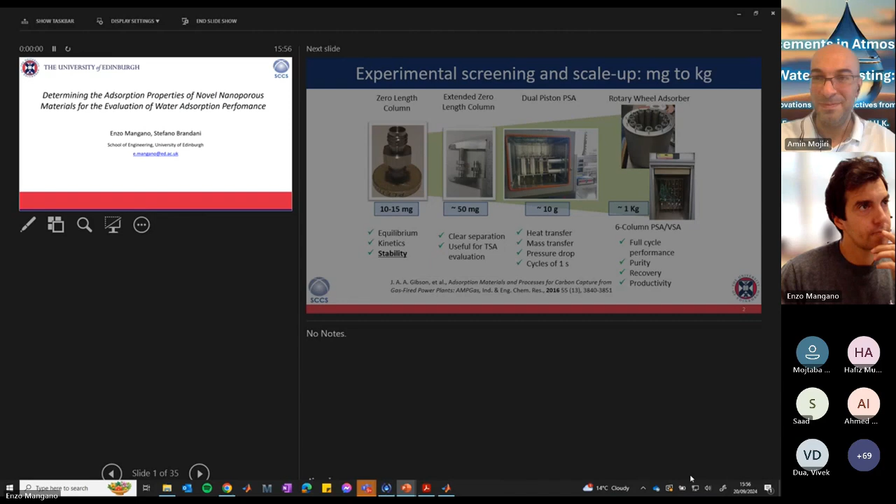Thank you. Can you all see it? Yes, perfect. Perfect. All right, so welcome everyone. Sorry for joining late the meeting. I've been teaching up to half an hour ago, so it's been a little bit complicated.

My presentation is about a technique we use in our lab to measure water adsorption. We are able to measure kinetics and adsorption equilibrium for water vapors. Professor Brandani and myself lead the adsorption group here at the University of Edinburgh.

We have quite a number of techniques, and we cover all the sample masses from a few milligrams, which is the zero-length column, the focus of this presentation, up gradually in mass to kilogram scale, full-size columns. For each of these equipment, we also have tools for simulations or model simulation from milligram up to kilogram scales.

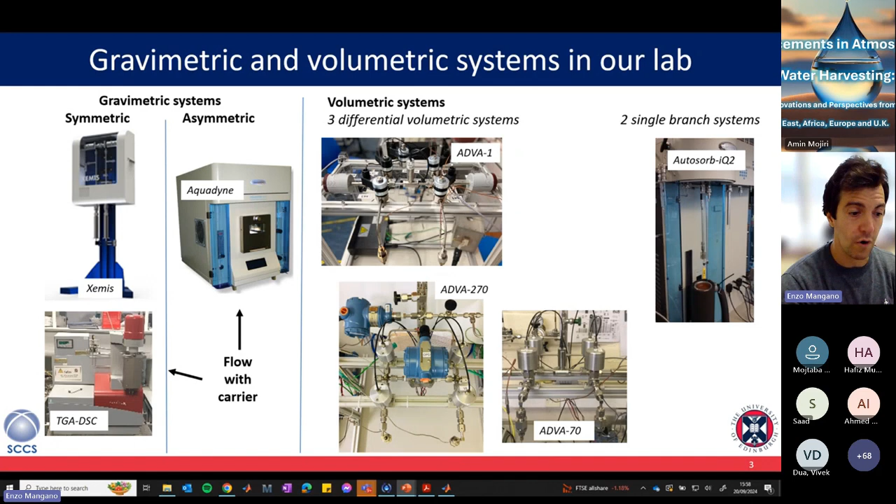Our lab is equipped with the zero-length column, but also balances, high-pressure balances, low-pressure balances, like the Aquadyne for water vapor, and volumetric systems, which are differential volumetric systems we designed going from low pressure to high pressure.

The talk is focused on our work on water adsorption, and the focus is on water harvesting. The scarcity of water affects millions of people around the globe, and one of the solutions researchers found is to harvest water directly from the atmosphere.

One possibility that concerns our field of research is using adsorption-based harvesters, designed in the simplified schematic like in this slide. Essentially you adsorb water at high humidity during the night, and then use the energy that comes from the sun to heat up the solid and desorb the water from the system, eventually condensing it and getting the water out.

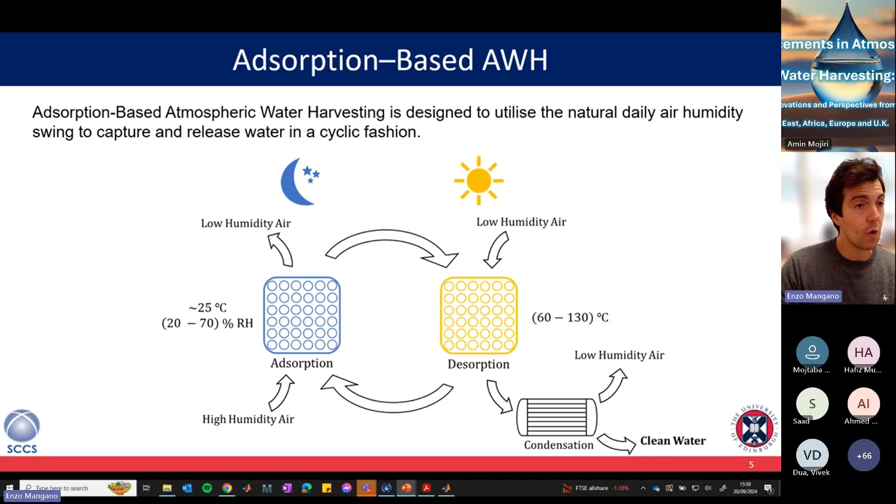The key issue here is to find the right material to do that. Because we work in adsorption, we work with nanoporous materials, so we are looking for materials that have certain properties that are ideal for this process.

We want something that can be regenerated at low temperature, because the impact on energy will be lower, with as much high adsorption of water as possible, fast kinetics, and that can operate at low relative humidity, because we are capturing water from the atmosphere. There are a number of material choices available, and we work with chemists who can design materials most suitable for this scope.

So how do we normally measure water adsorption? Classical methods: you can saturate your sample with water, get a single point, measure mass before and after to get the amount adsorbed. Or you can use very accurate balances and do repeated points to get the isotherm, or use volumetric systems—again very accurate, all commercial, but also very time consuming.

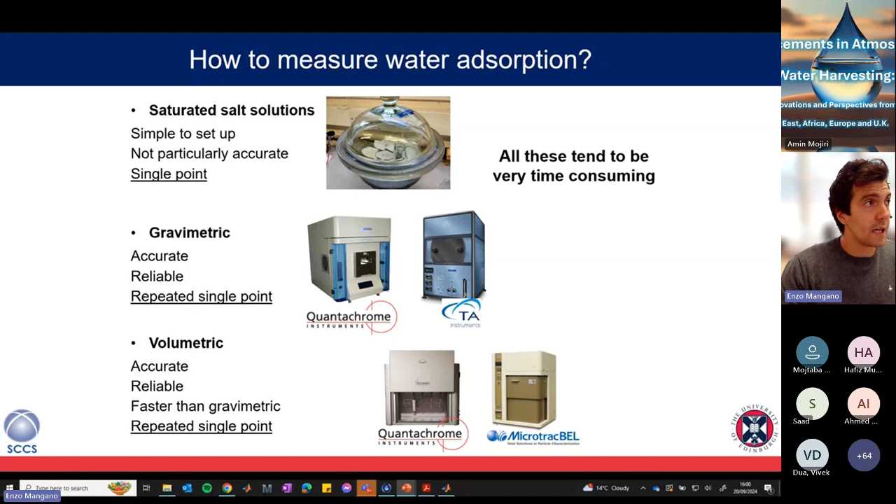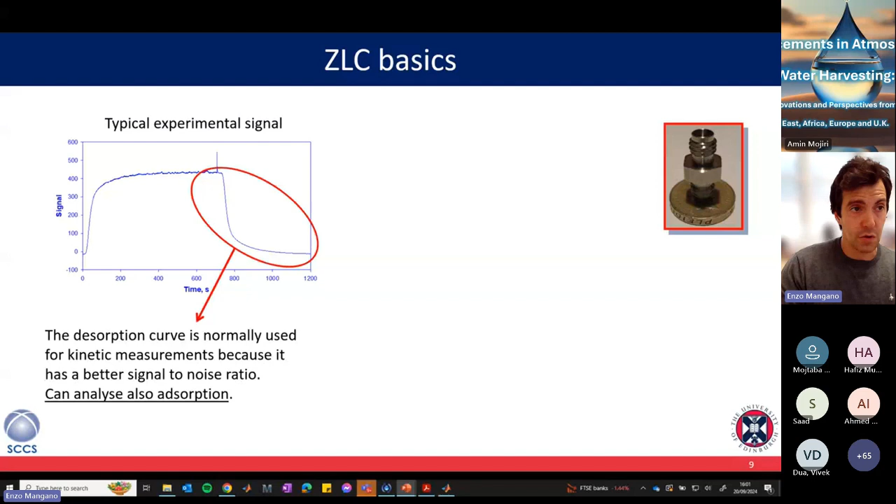How the experiment works: you saturate your sample with your adsorbate, which can be water in this case, and then you desorb. We normally look at the desorption curve, but for the water experiment we also look at the adsorption curve. We integrate the signal, and by applying the mass balance, we obtain the overall amount adsorbed and the isotherms.

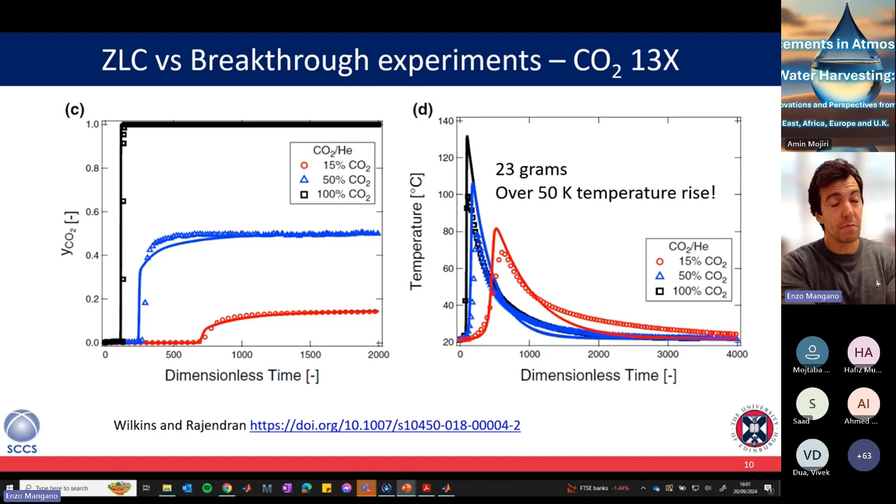What's the advantage of this technique compared to others? If you look at other breakthrough systems, for example CO2 in 13X, the issue is that even for small sample masses—say just 23 grams—you get a temperature change within the column of over 50 Kelvin.

Our system, working with a very small amount of sample, allows us to run practically in isothermal conditions, which is very important the moment you want to measure kinetics accurately on these small quantities.

In the case of water, we work outside the linear range of the isotherm. We look at the entire profile of the isotherm from 0 to practically saturation. We work at very low flow rates and very small amounts adsorbed, and because the concentration varies a lot, we also correct for the flow rates.

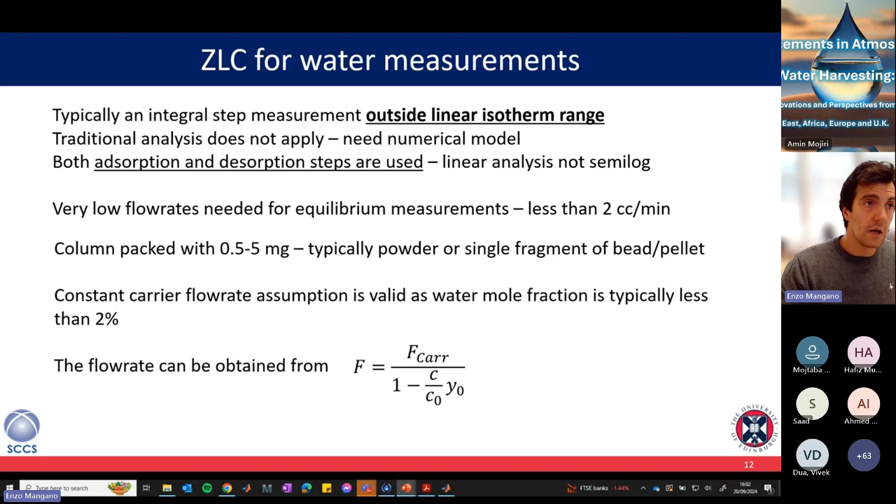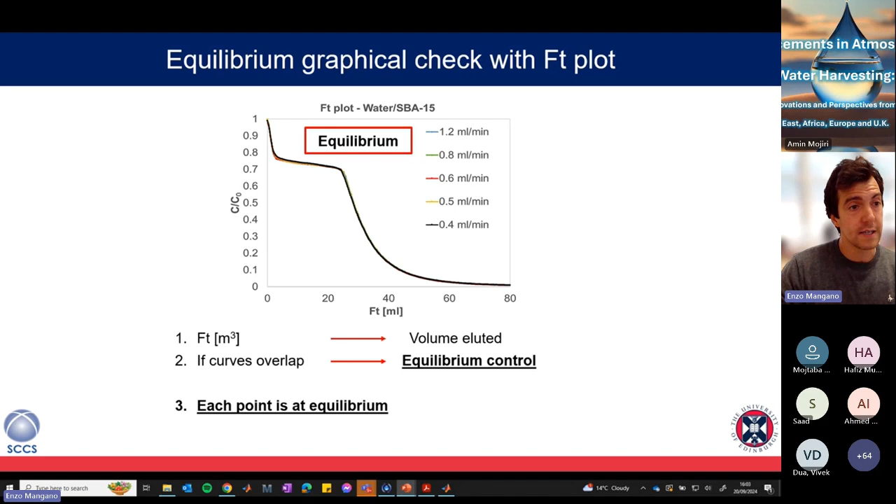When we run the system under equilibrium control, if you run it at a low enough flow rate, the system is essentially very fast, i.e. under equilibrium control, meaning every point of the curve is an equilibrium point. You can verify that by changing the flow rate - if they overlap in an FT plot, flow rate times time, it means they are in equilibrium control. So each point inside is an equilibrium point, which means that if you integrate it, you get the shape of the isotherm.

For our experiment, this is a typical profile of the raw data. You have the adsorption branch in red, and the green would be the desorption branch. So you saturate, reach a plateau, go to a new plateau, and then desorb. You integrate the system for both the adsorption and desorption branches, and you obtain essentially the isotherm for both.

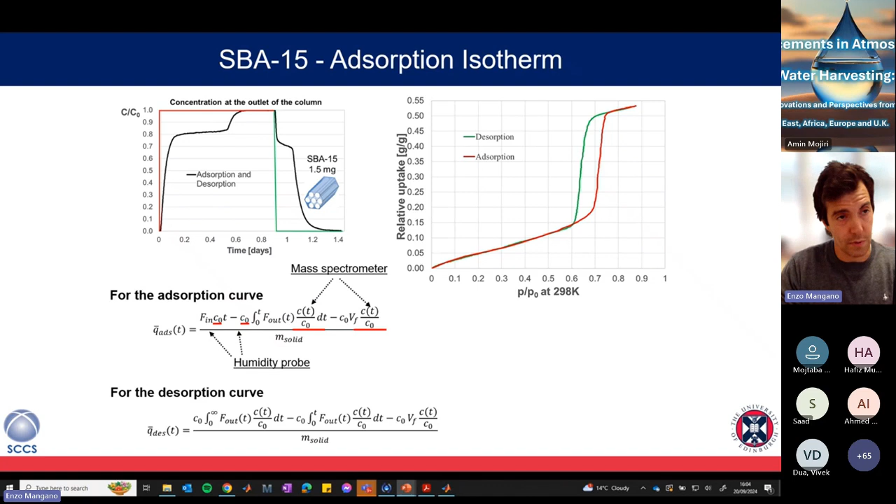You can change the sample mass and verify that the system is reproducible. And you can also run scanning curves, purposely not saturating the system and actually running the adsorption desorption in scanning mode.

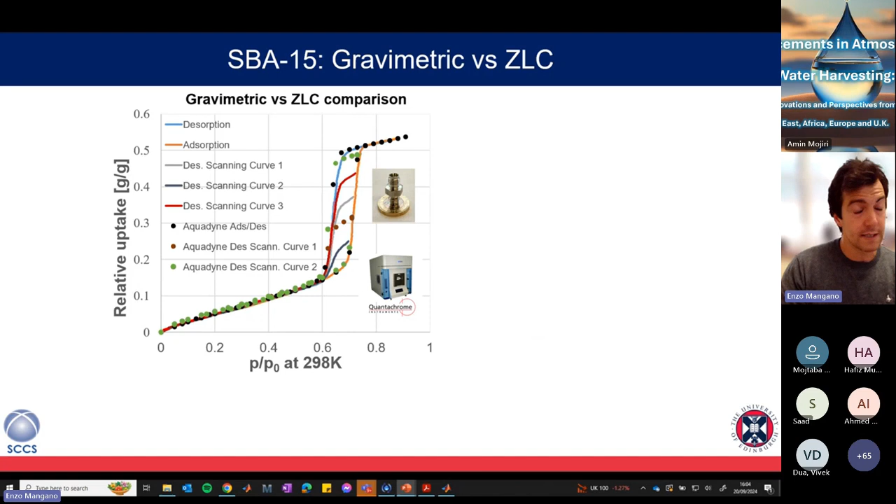We have verified our system also with commercial balances, and essentially we get the same amount of data, the same profiles, but with more than 10,000 points, in just a matter of 24 hours, maximum 2 days, compared to 9 days for our commercial gravimetric system that we use for double checking our results.

Obviously, the real other limit is that if you want to measure kinetics, you want to push your system into the kinetic regime to measure the actual mass transfer of the water inside the sample.

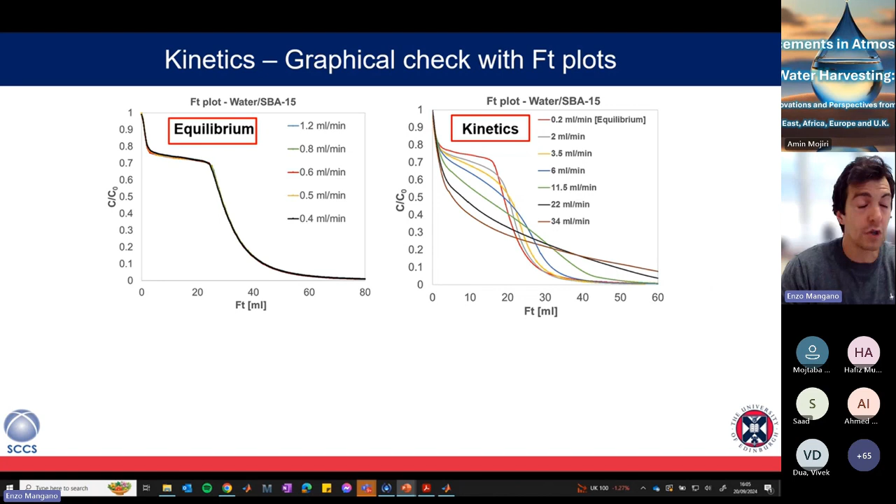This system, the one I'm showing here, is water on SBA-15. You increase the flow rate like you see in the plot on the right, and push the limit towards kinetic control, and now the curves do not overlap anymore. So now we are in conditions where you can actually measure the kinetics. If you have no crossing, no overlapping in the FT plot, you are essentially in kinetic control.

For this second part of the talk, covering the kinetic regime, this is a work we published quite recently in 2022, based on the mass transfer coefficient of silica gel for water in silica gel using the zero-length column.

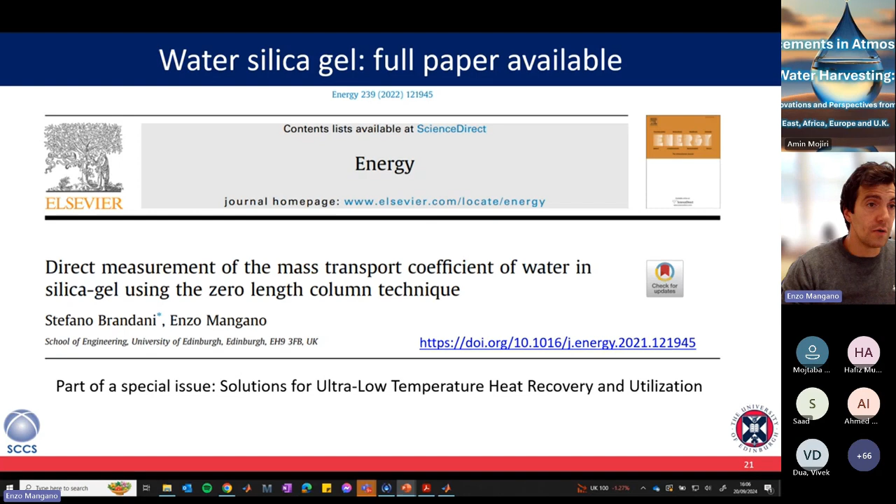I'll give a small introduction about what type of mass transport we expect. In the case of a commercial material that has macro, meso, and micropores, for macropore diffusion you have a few controlling mechanisms that can affect the total pore diffusivity. One is molecular diffusion, which depends on the carrier gas. The other is Knudsen diffusion as you go into the mesopores and smaller pores. Then you also have viscous flow, and eventually, in some cases, surface diffusion.

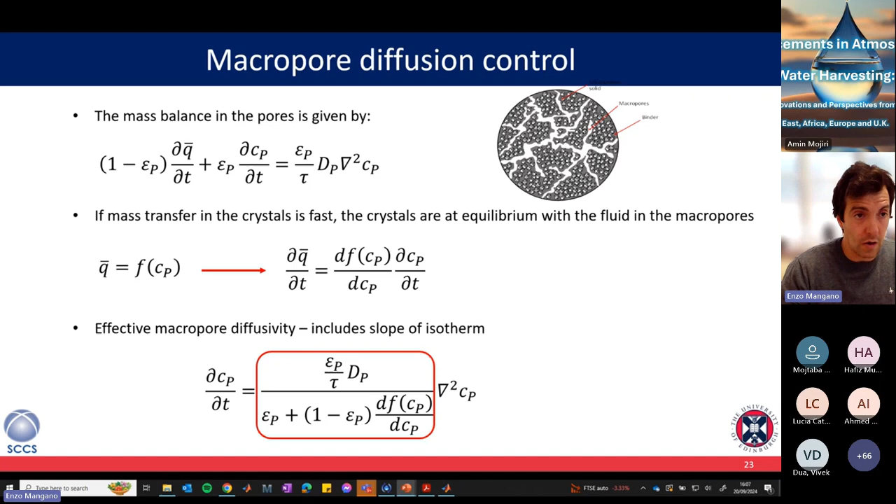You can write the mass balance for the macropores and essentially get the effective macropore diffusivity. The main dependency is the slope of the isotherm. If you look at the equation at the bottom, you find the void fraction, the total pore diffusivity, dP, and in the denominator, dF of dC, which is essentially the local slope of the isotherm. This means you need very accurate isotherm measurements to accurately determine the mass transport coefficient of water inside the sample.

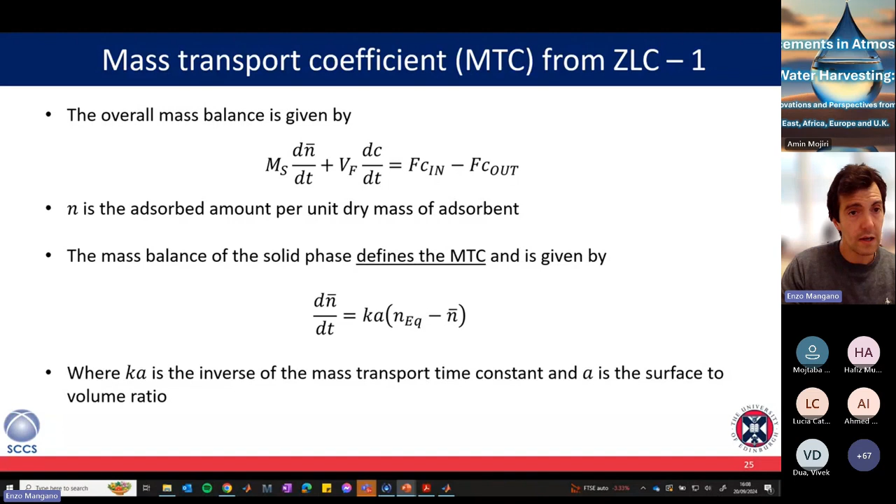Starting from that, we can write the mass balance for our system. We have accumulation in the gas phase, accumulation in the solid phase, and the flow rates coming in and out. We can define a mass transport coefficient, essentially Ka, where A is the surface to volume ratio. If we combine the two, we obtain an expression involving equilibrium, which is essentially our isotherm, so we need a very accurate measurement of the equilibrium to get the isotherm. All the rest is given in our experiment.

If you combine the two equations, you see that Ka essentially depends only on the flow rate, which we know, the concentration coming in and out that we measure, the flow rate, and the volume of the fluid, which is measured in the blank of our experiment. So we can calculate Ka by simply analyzing the signal we get from our experiment.

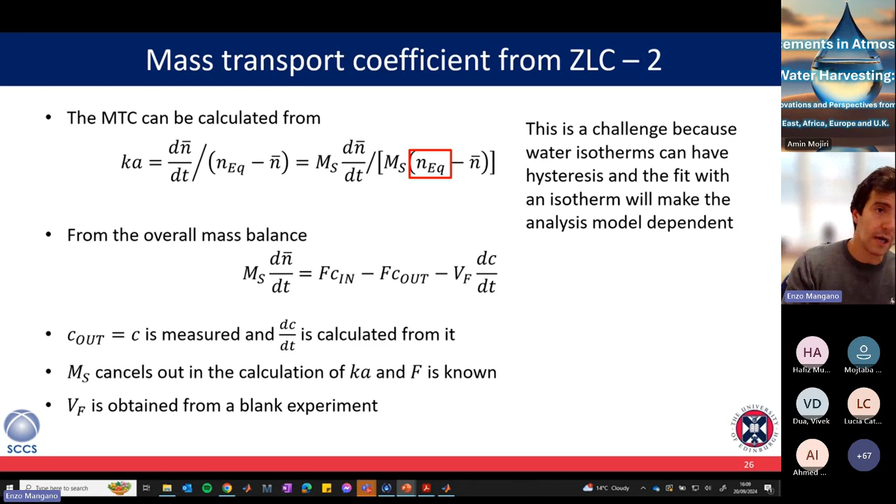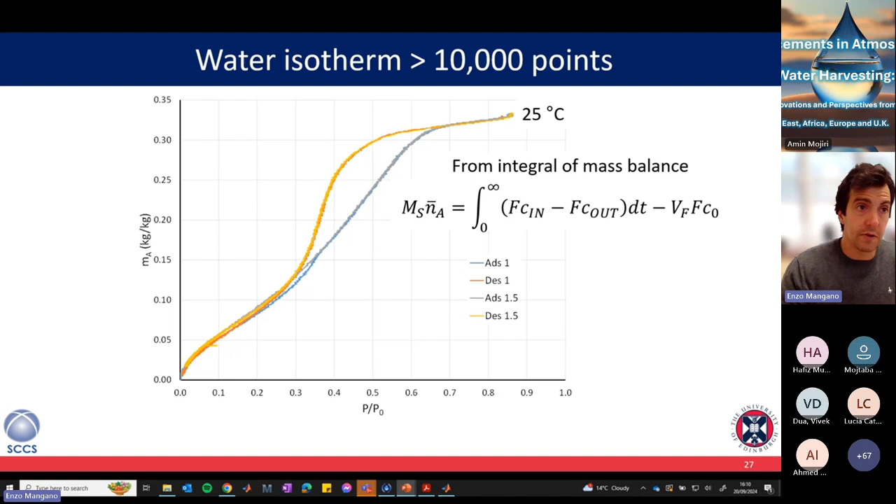This one comes from the integral of the breakthrough experiment of the system. Because we have so many points, we don't need a model based on the equation I just showed. We simply interpolate the data we get and use it directly to calculate the mass transfer coefficient.

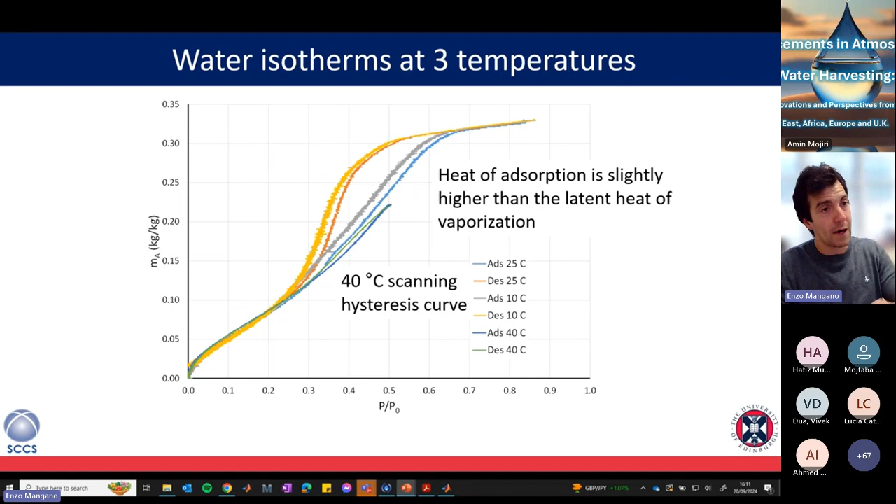We did experiments at three different temperatures: 25, 10, and 40 degrees. At 40 degrees, for example, it's practically a scanning curve because you don't reach saturation. So you do the adsorption and desorption by partially saturating the system.

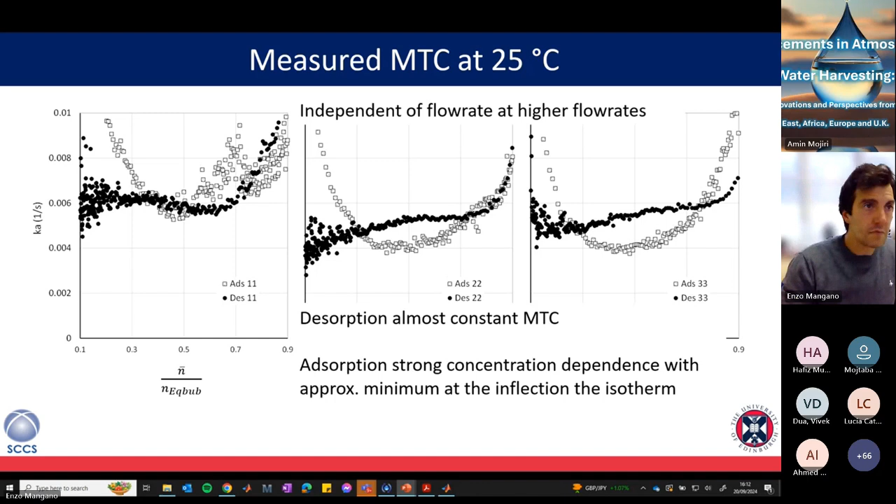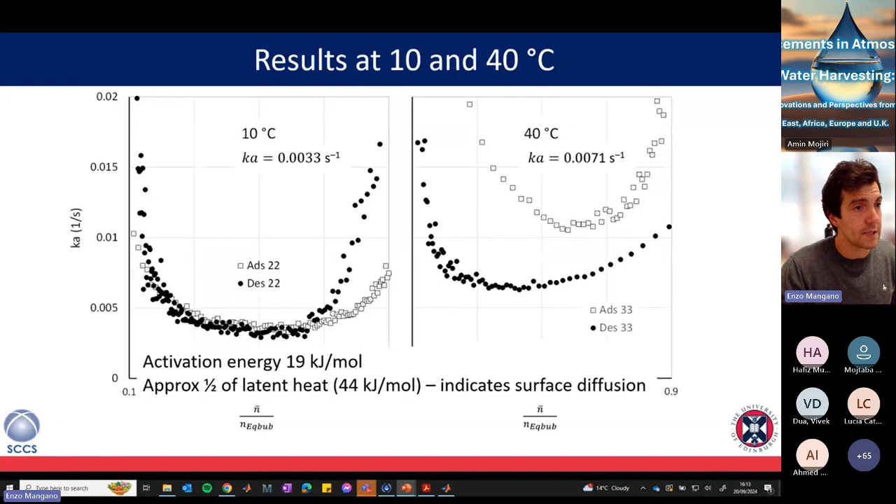We do that at different temperatures. This way we can obtain the activation energy of the diffusion/transport process, and it comes out at a value of 19 kilojoules per mole. You can compare this with the latent heat, and it comes out roughly half of it. This means there is not only Knudsen resistance in the system, but also a contribution from surface diffusion. Because if you remember the equation that defined the mass transport in the macropores, the surface diffusion has a contribution with the slope of the isotherm, so there is a dependency of the isotherm with temperature, which is included in that term.

Now the final check is, since you are in the regime of macro-mesoporosity, you want to check if your kinetics change with a change of carrier. We did all the tests using nitrogen as a carrier, so a mixture of nitrogen and water, and for the check we changed the carrier to helium. In a normal macropore system, this would indicate the system is controlled by macropores, because changing the carrier changes the molecular diffusion. But because the system we measured had essentially no macroporosity, only mesoporosity, molecular diffusion does not play a role in this case.

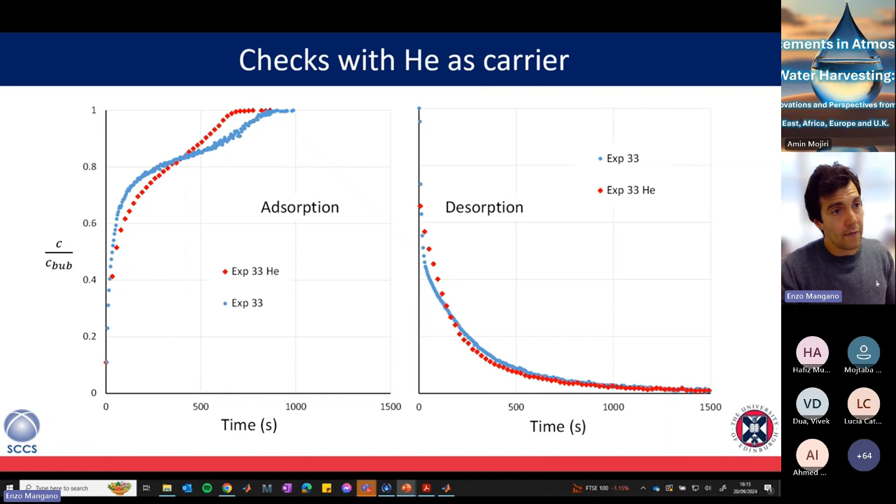So what we see here, the fact that they do not overlap, indicates that potentially the system is not under isothermal conditions. So what we did then was essentially look at a simplified calculation. For the flow rate and particle size we were using, we obtained a Nusselt number of 5, to extract essentially the heat transfer coefficient.

So there is a contribution from non-isothermality into the value of the mass transfer coefficient that we extracted from this experiment. This tells you that even in a system with a very small amount of sample, in our case only 4 milligrams, a system with water, which has a high heat of adsorption, is always prone to non-isothermality. Hence we have to take this into account, and we need ways to check if our system is isothermal or not, especially if we want to extract the diffusion parameters for the system.

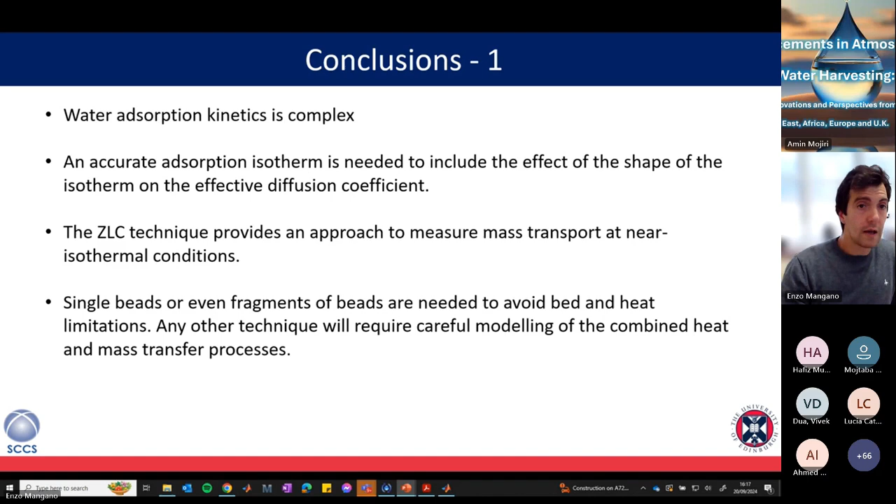We developed this system, the zero-length column, adapted from gas adsorption to vapor adsorption, to actually have a lot of definition in terms of number of points. It allows measurements to be done in a fraction of the time compared to gravimetric and volumetric systems that are commercially available. It can be done with a very small amount of sample, so it's ideal for chemists who, for example, produce only very small amounts of material. And we can use it by playing with the flow rates and the temperatures.

We can explore the system under equilibrium and kinetic regime, because for the kinetic regime you also need a very accurate isotherm. And obviously, even with our system, we notice that there are conditions where isothermality is not always guaranteed, so you actually need a way to check and include that in your models. We also detected the presence of surface diffusion in the mesopores for our water in silica gel system. With this, I conclude my talk, and I welcome questions from the audience. Thank you very much.

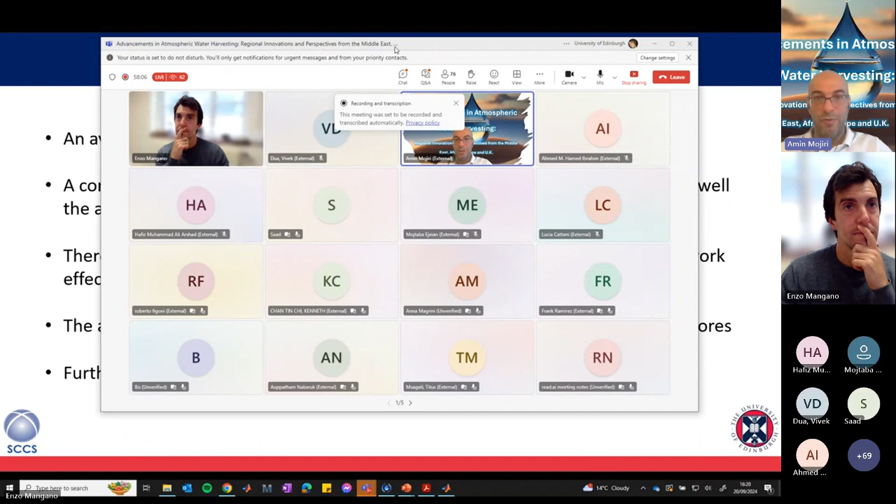In the meanwhile, I would like to ask a question. Can you elaborate how the ZLC ability to measure mass transport kinetics enhances the understanding of material performance in low humidity conditions? Essentially, in low humidity conditions, it kind of simplifies the issue, because you don't have to go all the way up into the nonlinearity region.

The zero length column method was invented and we normally use it in very low concentration, so working in harvesting and atmospheric adsorption of water is a little bit easier. You tend not to get to the branch where you have adsorption and desorption hysteresis. You work in the bit of the isotherm which is low, where adsorption and desorption coincide. You simply lower the concentration of the relative humidity at the inlet and work in that region. The analysis is practically the same, but you remove the complication of hysteresis, where the branch of adsorption and desorption are not the same.

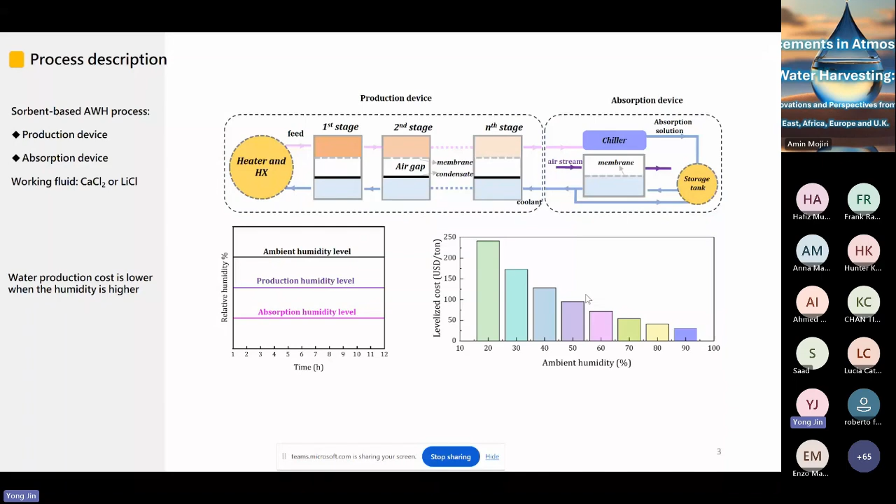Let's dig into more details about the cost model. Generally, the water production cost is composed of two components: one is the capital cost, the other is operational cost, the daily operation cost.

The capital cost includes the membrane modules investment, the heaters, the heat exchangers, pumps, and the chemicals used, and the water storage tanks. These are the capital investments.

The operational cost involves parameters such as pressure drops and the energy input in the production device, and also the energy input into the absorption device. These parameters can be calculated by a fluid dynamic model coupled with heat and mass transfer, including parameters like flow rate, hot feed inlet enthalpy, coolant outlet enthalpy, hot feed outlet enthalpy, pressure drops within the system, and vapor fluxes.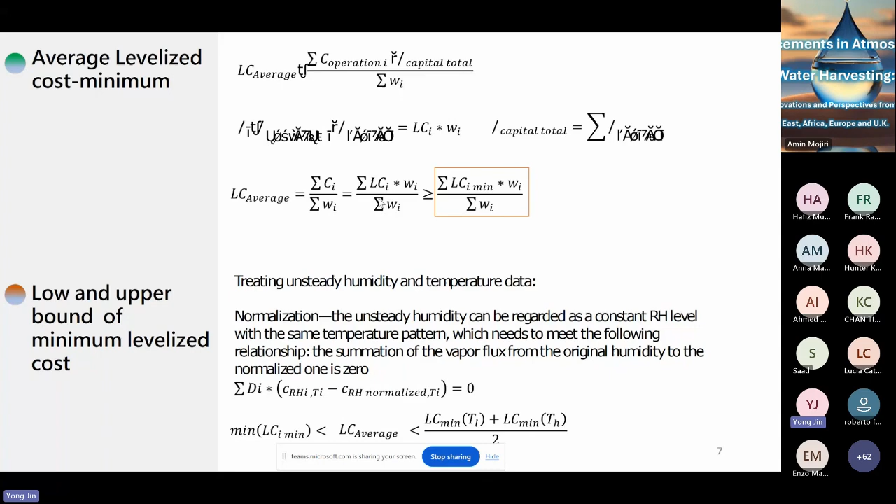For example, if the normalized pattern is equal to 80% relative humidity, you can get a range where the minimum is the lower bound of the average levelized cost for a fluctuating pattern, and the average between these two ends will be the upper bound of the fluctuating levelized cost pattern. So with this methodology presented above, we start to evaluate the feasibility of storing water at high humidities.

The first mode we may conduct for storing water is at nighttime, because at nighttime the relative humidity level is always higher than in the daytime. For example, here at nighttime the humidity level is higher, so we can do the water absorption at night with more hygroscopic solution.

We can do absorption for 12 hours at night, or 8 hours, or 4 hours, or 1 hour. The difference is if you do 1 hour's absorption, the normalized humidity level might be high, but you have to use much more hygroscopic solution for the absorption, and you might need more absorption devices for this process.

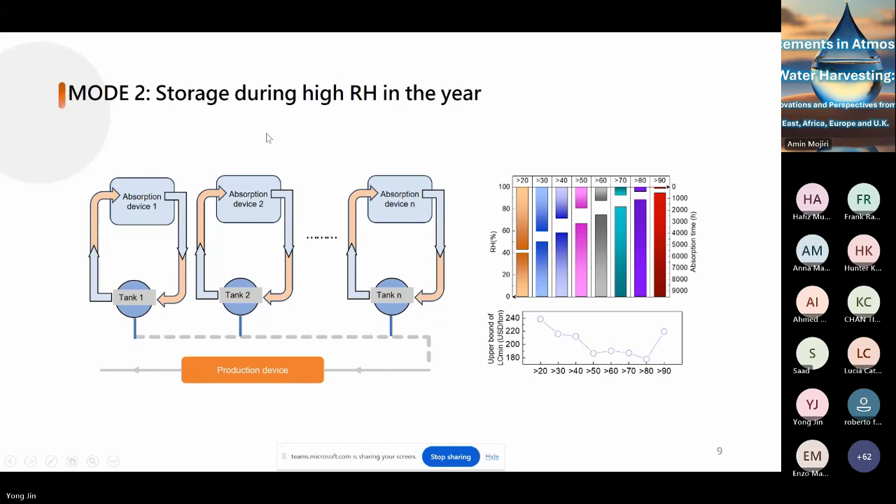In conclusion, we propose a strategy for storing water vapor at high humidity levels for water production during low humidity periods, and the feasibility is demonstrated by a techno-economic model. The model shows that we can save a lot of money by adopting our strategy.

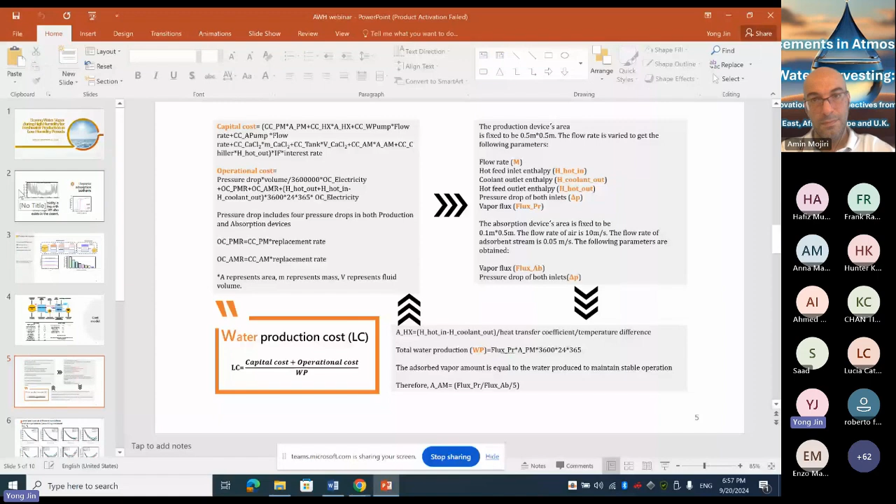The membrane, you mean the device presented here? Yes. Actually, we just published a paper about these devices. It is constructed by 3D printing. We printed these channels, feed channels, hot channels, and then assembled the channels with membranes, like PTFE membrane, with L-gap frames which are also 3D printed, and then sealed it into an integrated device. So we have published one paper about this device.

Thank you. Any other question? We haven't seen some question.

What is the purpose of the airstream in the absorption device section on slide 3? To enhance the mass transfer - we have convection mass transfer, so if you have an airstream it helps to accelerate this process.

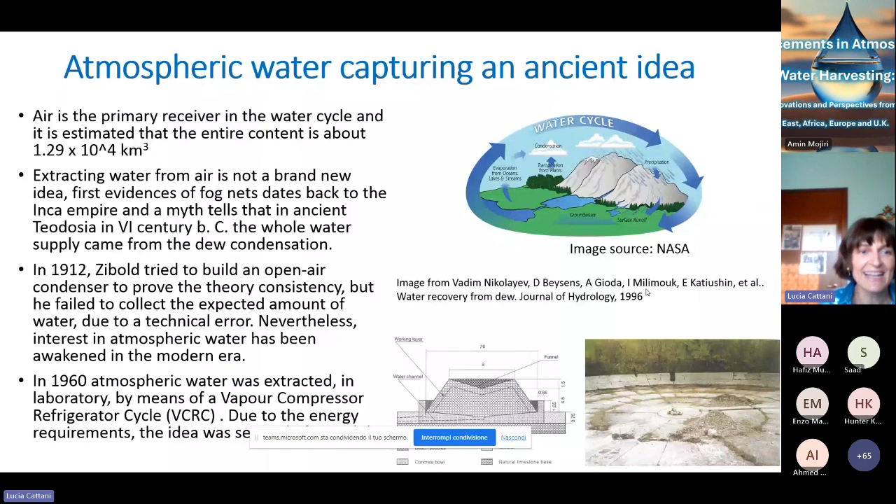And in 1960, a first sample of a vapor compressor system in order to extract water from air was constructed and built, and the experiment was successful. At any rate, the energy required was too much, so the idea was put aside for a while.

But in the last 15 years, due to technological evolution and the worsening of the water crisis, atmospheric water has become more and more interesting. Thus, atmospheric water is currently seen as a possible answer to the Blue Deal.

But we must remember the main issues related to atmospheric water. First of all, we want to achieve significant quantities in a relatively small place - tens, hundreds, thousands of liters a day. And we want affordable energy consumption and a system able to extract water in huge quantities across different climates. Last but not least, we want high quality water.

We must remember that atmospheric water is not pollution free. Pollution can come from the process itself, from the device devoted to extracting water from air, and from the airborne content. So we can have biological pollution, chemical pollution. We must remember that atmospheric water harvesting is a multidisciplinary topic.

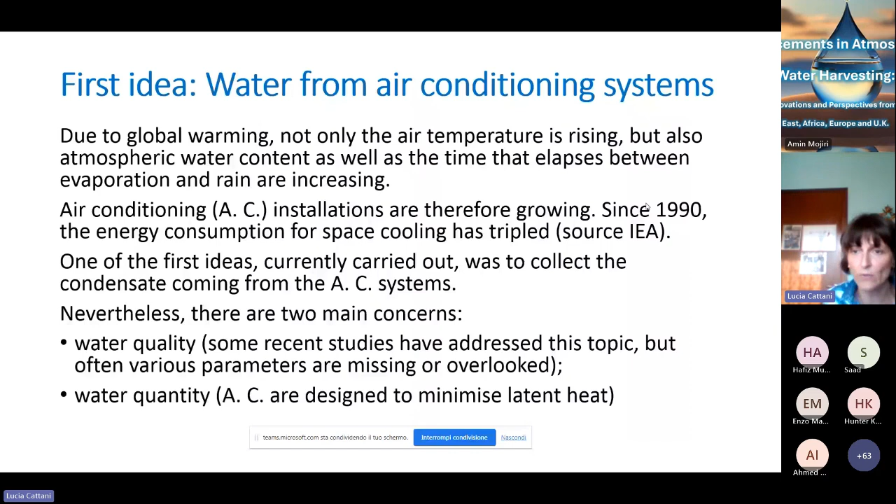So the next step, in order to use a vapor compressor reverse cycle to collect water, is to build a machine devoted to do that. So the atmospheric water generators are based on a reverse cycle designed and built to do that.

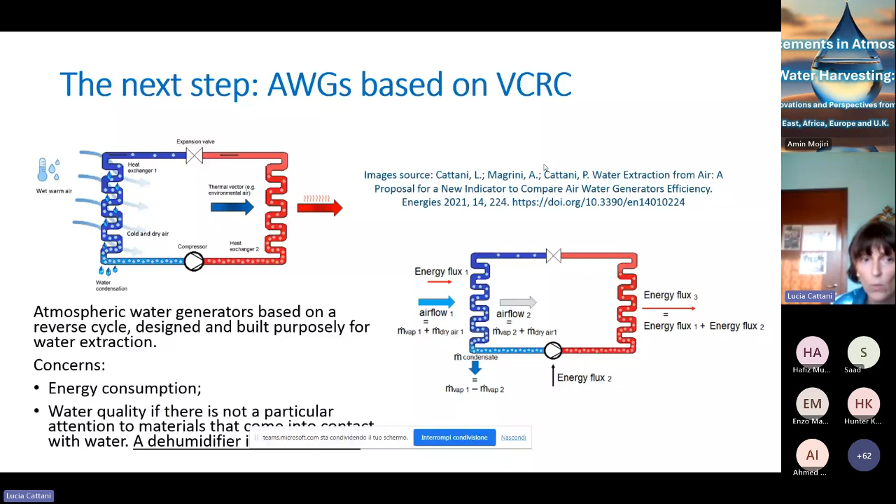Which are the main problems related to such devices? The main problems are, first of all, the energy consumption, and secondly, the water quality is sometimes not okay because the issue is overlooked. So which is the next step in order to achieve good yields, good quality, and to address the energy problem?

It is the integrated AWG machines. Such a machine is built on the idea of the vapor compressor cycle, but it is a smart application because it is designed to offer the possibility to collect not only water, but also the by-side energy product of the cycle.

The process to collect water from air on a reverse cycle is to treat an external flux of air, which is cooled down under its dew point. Thus you obtain a cooled and dried flux of air. Instead of disposing it into the environment, such an integrated machine makes it available to users in order to cool down some places, for example. The other thing you obtain is water condensation, of course. And the third useful effect is the thermal energy coming from the air. The coolant extracts some energy in order to cool down the air, and that energy is not disposed into the environment, but used as a heating source. Thus, with one energy coin, you obtain 3 useful effects.

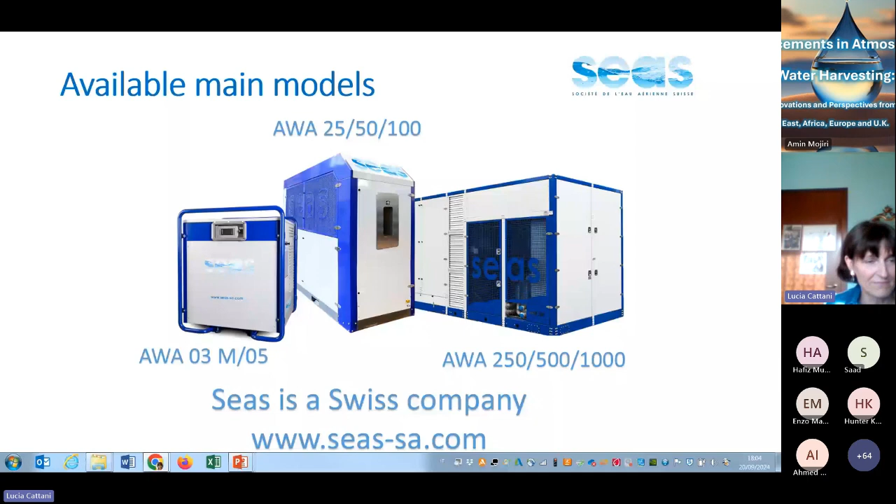After the construction of such a machine, one of the first issues was to understand how such a machine behaves in the various climates. So a physically based real-time model integrating energy and mass conservation equations was built. Thus we developed such a model, and the model is able to give as output the machine behavior, including water production, energy consumption, cooling and heating power, when the input data are the temperature and relative humidity of the place.

And we achieved a very, very interesting result because the error of our model, fine-tuned on a real machine, is under 5%. Such a model is very useful because it can be used not only to predict what a machine can do, but also to analyze real data in order to understand how a machine can behave in a place in the future, for example.

Now I'm going to describe one of our real experiences. We have a lot of case studies, of course, but I wanted to describe this one because it is interesting. We at SEAS installed a machine in Dubai, in a worker village. It is an integrated machine, AWA 250, able to produce thousands of liters a day.

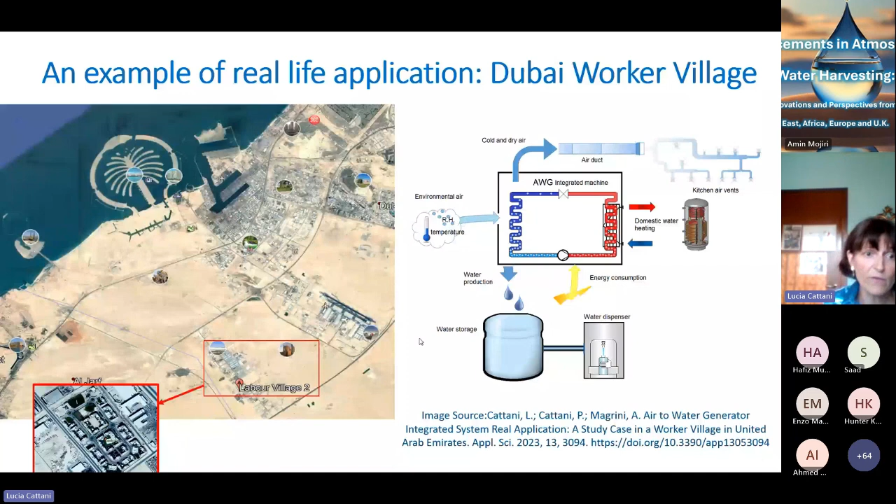The worker village is a village for workers, and it is composed of several residential buildings, each one housing about 200 guests. The buildings need heating, and there are common kitchens devoted to preparing meals that need heating and cooling, and guests need drinking water and domestic water. The domestic water is already produced by the desalinization system and can be heated up and used for showers, for example, while the drinking water is provided by means of plastic bottles.

We connected the machine to the common kitchens, and the dried and cooled air was delivered to the common kitchens, while the heating power of the machine was used to heat up the domestic water. Here you can see the tank of the domestic water and the existing LPG boiler that was used as a backup. And the drinking water was collected and then distributed by a dispenser in order to avoid the plastic.

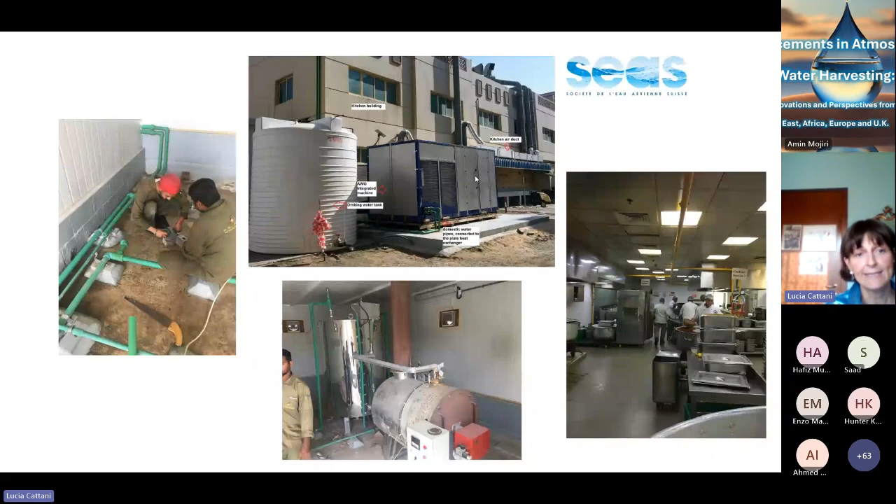We carried out the test for 3 months. Data were analyzed by the University of Pavia, by me. And we calculated that it was possible to achieve the following results. The machine was able to cover all the heating needs of 2 residential buildings, partially cover the cooling and heating needs of the common kitchen, and provide drinking water for 800 persons a day. So it is a very impressive result.

We also made an economic assessment, and we found out that taking into account all the costs - materials, system installation, transport, and so on, and maintenance - and all the savings - electricity, LPG, water - the payback time of the investment was only 2 years.

Another study that we conducted was how to measure the efficiency of such multi-purpose machines, because these machines are multi-purpose. So we developed a particular index in order to be able to judge such kind of machine with one number, not only machines able to produce water, heating, and cooling at the same time, but all the multi-purpose machines belonging to the heating, ventilation, and air conditioning systems.

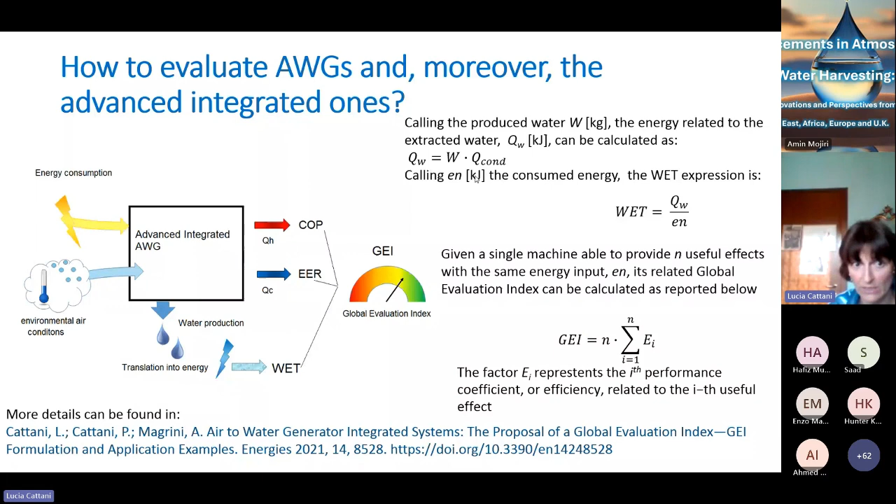But water quality - is atmospheric water useful only for drinking purposes? Oh no, it can be used also for technical purposes. For example, we studied the quality of our machines and the quality of the water coming from machines, and we found out that it was okay in order to maintain photovoltaic panels, to be able to clean them directly with the water produced by the system.

Enel Green Power asked us to install a machine in Ruby, which is a Mesa in Peru, and it has very harsh conditions, a dry salt desert. The machine was particular because it was designed in order to produce in desertic conditions, and the water coming from it was used, and is currently used, to maintain the photovoltaic systems.

But another one of the last applications that we analyzed is about hydrogen generation. A request came from a Japanese island in Iriomote, where it was planned to install a 2 megawatt photovoltaic field combined with electrolysis. No fresh water was available because such an island is protected - it is a place where you cannot use fresh water for technical purposes.

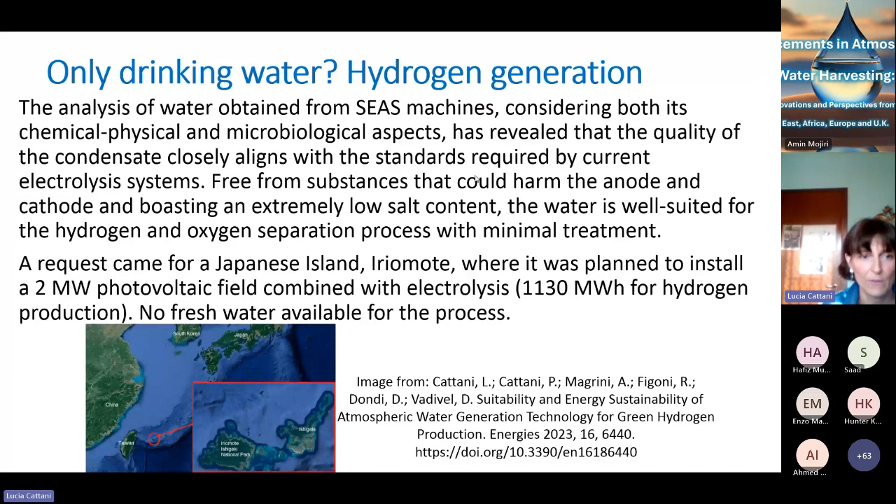So we studied the quality of our machine, and we found out that without treatment, the water, because of all our attention to the materials composing the machine, to the air conditioning, to the air filtration system, was almost compatible with the chosen electrolyzer. So with a little treatment, we were able to achieve the wanted result, and thus we made a study about the possibility to integrate the machine with the electrolyzer and the photovoltaic system.

We found out that only running the machine during the sunny hours, the machine was able to produce more than the requested water for the electrolyzer. So the exceeding quantity was intended to clean up the panels, and the efficiency recovered by the maintenance was enough to run the machine. So we closed the energy cycle.

It is interesting to analyze water from air as the raw material for hydrogen generation, because we can close a cycle. We extract water from air, we split it into hydrogen and oxygen. When the hydrogen is then recombined in order to obtain energy, we obtain also vapor, thus water in the air, and we close the cycle.

On the basis of our results, the applied physics team of the University of Pavia, in collaboration with that of the University of Genoa, in 2023 won the PRIN funds for a 2-year-long project concerning the integration of such kind of machine with heating, ventilation, air conditioning systems. The project wants to promote water saving and energy saving by means of the integration point of view.

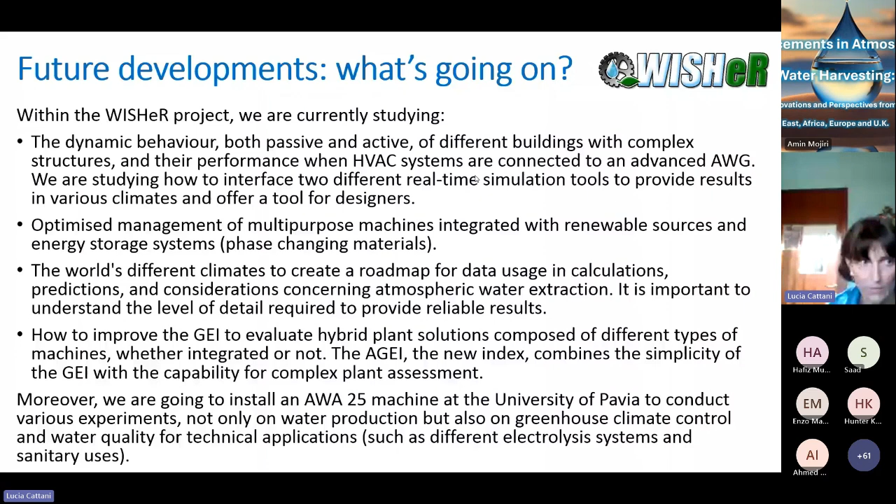In SEAS, we are working on improving the efficiency of our machines with an in-depth study on the major items. We wanted to reduce the spaces, reduce the costs, improve the efficiency and the multi-purpose capabilities, so functioning as a heat pump, functioning as a cooling system while producing water, always with the same energy consumption, improving the control system to achieve even better results.

We wanted to expand the operational range, and we are also studying some hybrid solutions to encompass, for example, adsorption materials to enlarge the operational range, and also to provide water extraction from air even in cold climates, which is the real main challenge.

In conclusion, we can say that atmospheric water can be one of the means to address the water crisis, and can be an alternative solution to the traditional ones. The integrated approach can allow us to address not only the Blue Deal, but also the Green Deal at the same time, because we provide energy saving and water collecting from air with the same energy consumption, with the due quality.

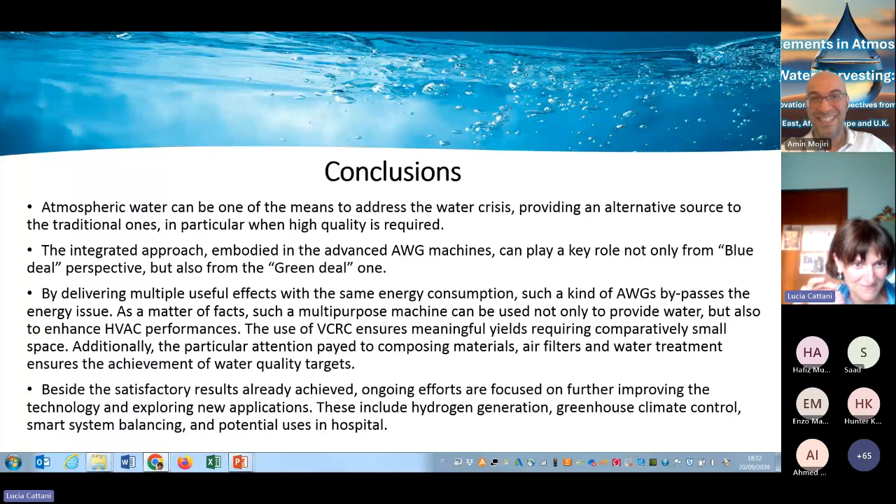I know, but I use capturing because you told me that you decided to use capturing. So in my last paper, I'm writing capture. But anyone can answer, which one do you prefer: atmospheric water harvesting, atmospheric water capturing, or atmospheric water extraction?

We try to find a perfect name for it. Okay: atmospheric water generator, atmospheric water harvesting, atmospheric water extraction, atmospheric water harvesting, atmospheric water generator, atmospheric water harvesting and extraction. But the generator is the device. Yes, I agree with you. Atmospheric water harvester, atmospheric water harvesting, extraction.

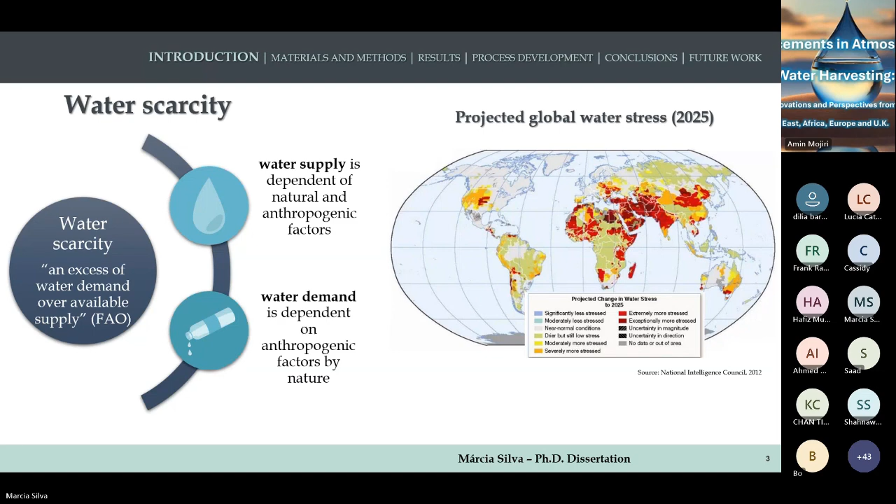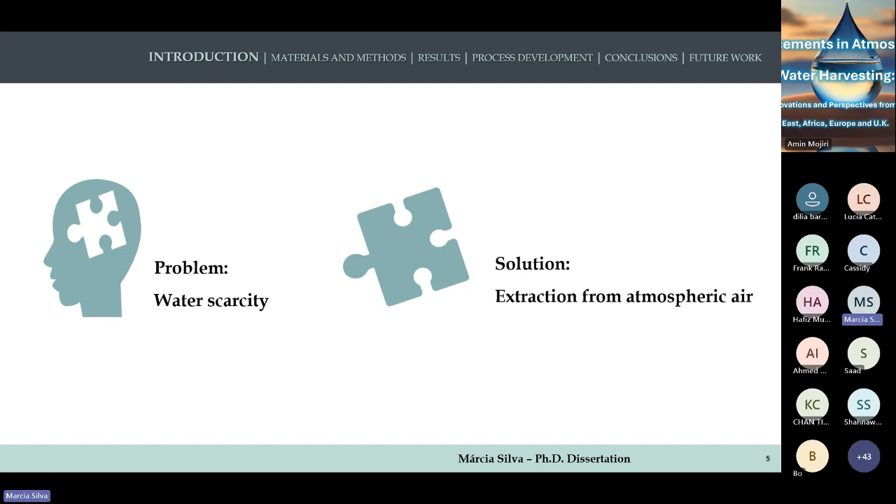Traditional water sources are heavily dependent on predictable rainfall patterns and infrastructure, which are increasingly unreliable due to climate change. Water scarcity is a problem, especially in arid and semi-arid regions. Extracting water from the air could be a solution, as it can be applied in areas where there is no availability of liquid water.

There is 10 times more water in the air compared to the total amount of surface water in rivers and lakes. There are 3 main types of atmospheric water harvesting technologies: Type 1, heat pumps or radiative cooling; Type 2, water vapor concentration by desiccant; Type 3, convection-induced control in a structure.

During my PhD, I studied Type 2, the water vapor concentration by desiccants. A sorption-based process should use materials that require low energy regeneration, step-shaped isotherms, water stability, high cycling performance, and high water capacity.

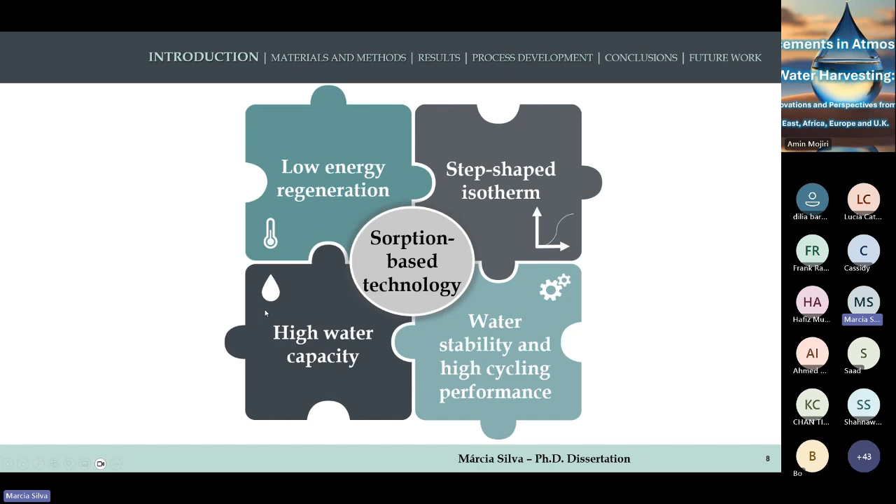The most common desiccants are zeolites, alumina, activated carbon, and so on. However, they are not ideal materials for water capture. Zeolites have a favorable water adsorption isotherm, but the material's regeneration is more complicated and requires high temperature.

MOFs belong to a new class of desiccant materials and are promising for water adsorption. One of the major advantages of MOFs is the wide variety of isotherms they offer. Here we can see examples of novel water desiccant materials with different typologies of isotherms.

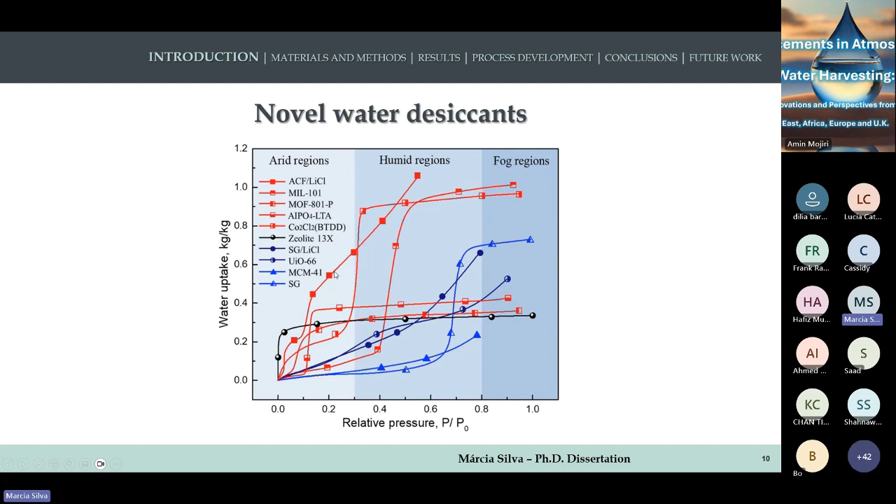MOFs are crystalline hybrid materials known for their high surface area and tunable porosity, making them ideal for a variety of applications such as hydrogen storage, catalysis, heat pumps, and adsorption and separation.

During my PhD, I tried to solve the problem of water scarcity, especially in arid and semi-arid areas, which can be mitigated through atmospheric water capture. To this end, an adsorptive process capable of producing water was developed. The objective of my PhD was to design an efficient adsorptive process for water harvesting.

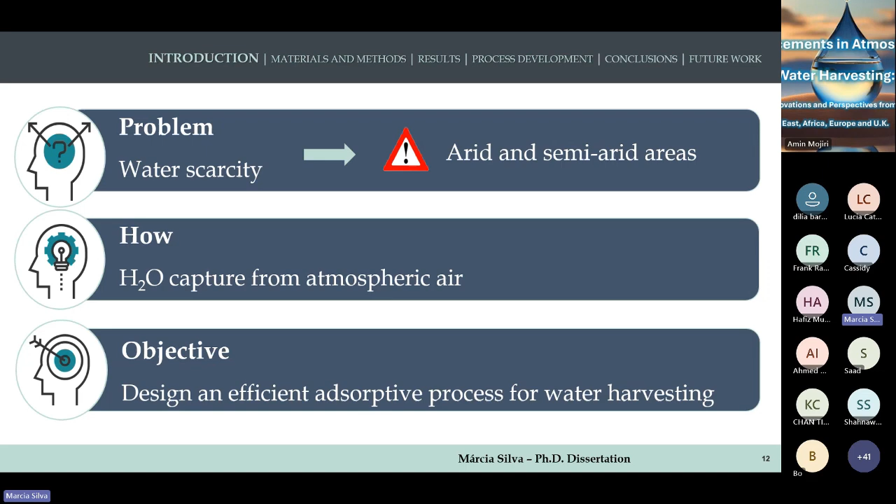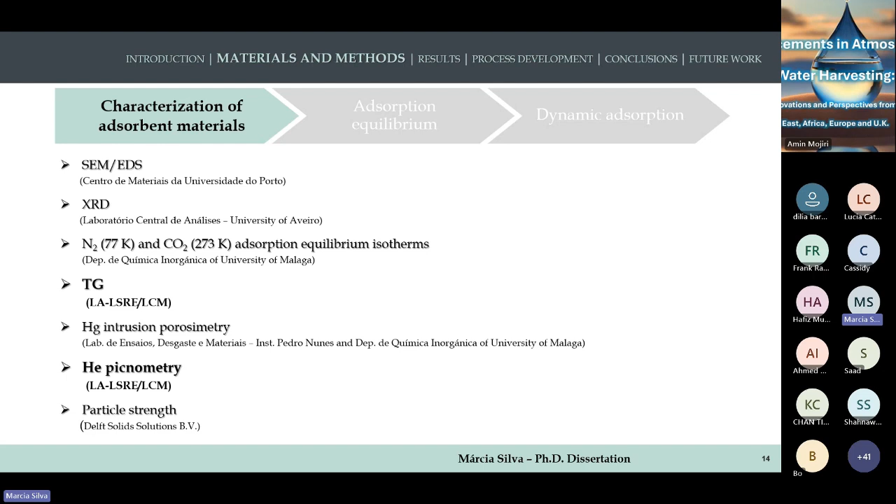To study the absorption dynamics, breakthrough curves were performed in a fixed bed at 1 bar and ambient temperature. The column was regenerated with helium and fed by two gas streams. One of these streams is presaturated by passing through a bubbler. Temperature and humidity sensors are placed at the inlet and outlet of the column, along with a temperature sensor in the middle of the column. The gas mixture at the column exit is analyzed by an infrared analyzer.

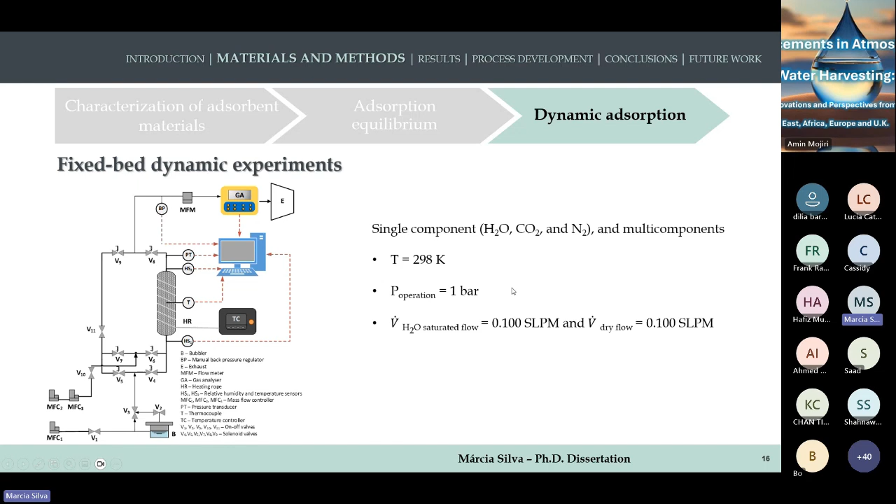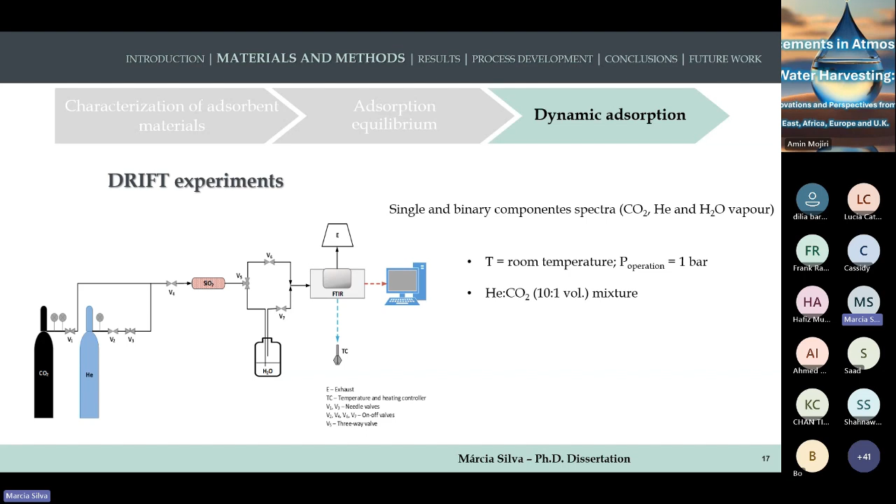These are the conditions of operation. In the DRIFT analysis, the effects of temperature, water absorption, CO2 absorption, and co-absorption of CO2 and water vapor were evaluated. All spectra were measured at ambient temperature and a pressure of 1 bar.

The isotherms of the MOFs, except for MIL-100 iron, exhibit Type 1 characteristics, typical of microporous materials. In MIL-100 iron, the isotherm is both Type 1 and Type 4, indicating the presence of micro and mesoporous cavities. As this material possesses both types of cavities, it has the highest pore volume.

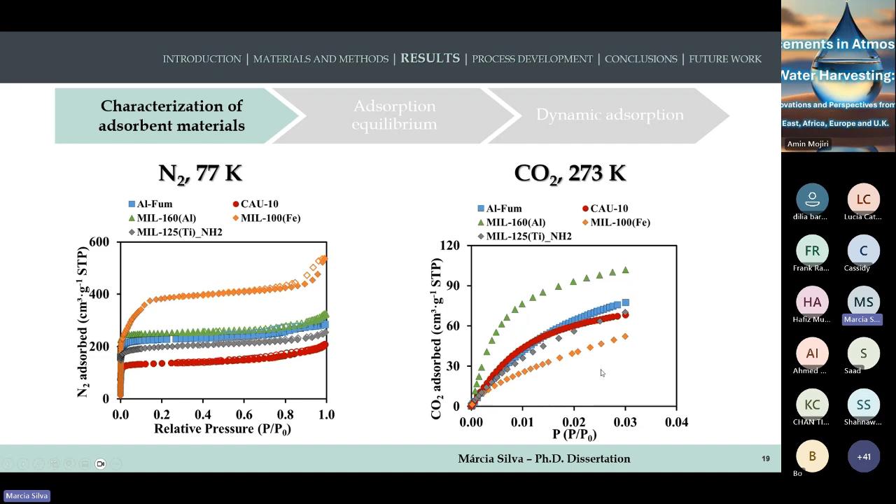Regarding CO2 adsorption, all materials exhibit Type 1 isotherms. The equilibrium absorption isotherms for O2 and N2 are linear for all of them.

Meanwhile, CO2 exhibits type 1 isotherms. The amount absorbed for O2 and N2 ranges from 0 to 1.6 mol per kilogram. For CO2, it ranges from 0 to 8 mol per kilogram, indicating that all materials show a higher affinity for CO2. The isotherms were fitted using the Langmuir model, and the equilibrium constant was determined using the Van 't Hoff equations.

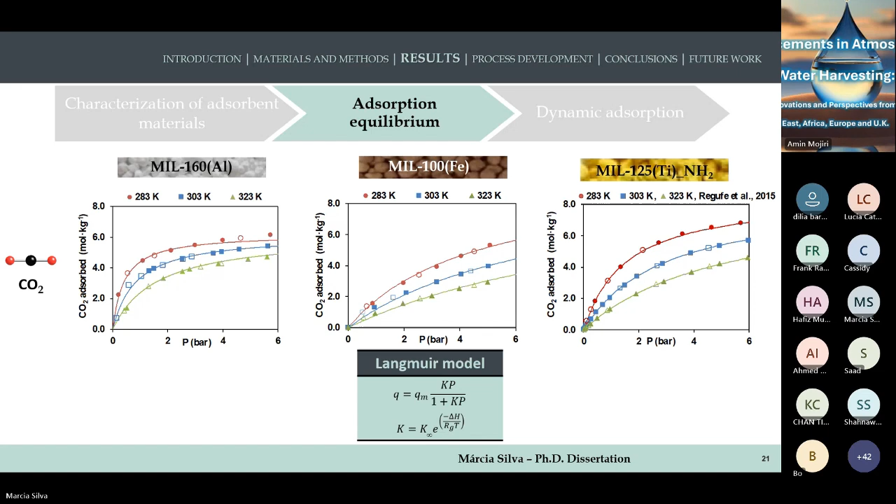For MIL-160 aluminium, the isotherms are type 5 and were also fitted with the CMMS model. I present here the main results.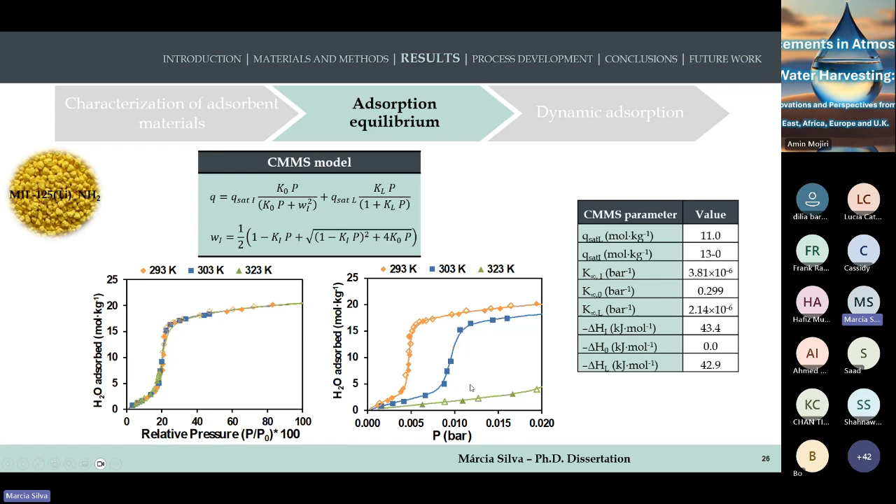So the obtained data allows for the development of a mathematical model aimed to describe the dynamic behavior of water adsorption. This model was then validated using the experimental data obtained from the breakthrough curves and was later used as an essential tool for developing the cycle water capture process. So with the mathematical model and the validations, we had the absorption dynamic behavior.

Here, the water breakthrough curve for 160 aluminum is presented in this figure. During absorption, a dispersive front is observed up to 5% of relative humidity, which corresponds to a favorable isotherm up to 5% in the equilibrium data. Subsequently, a compressive front is observed, and during the desorption stage, a dispersive front is observed up to 14% of relative humidity, followed by a compressive front.

The behavior is consistent with the equilibrium data, as from 50 to 14%, the isotherm is unfavorable, and then it becomes favorable, like you can see here, okay, and here.

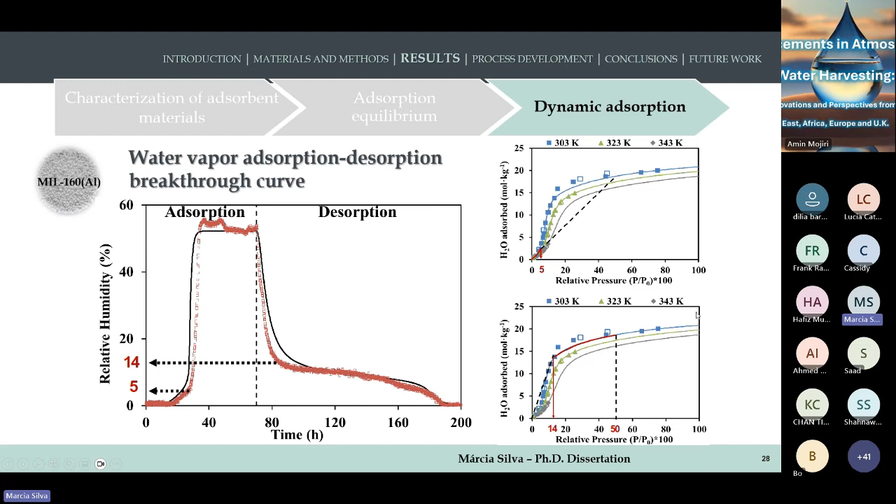For these three materials, they also follow the expected behavior based on the equilibrium data. The dynamic absorption behavior of water was well predicted by the mathematical model, particularly in 125 titanium amine. You can see here that there is almost no deviation between the model and the experimental data.

On the other hand, both fittings applied to the water vapor adsorption equilibrium isotherm for Al-Fum, which failed to describe its dynamic behavior. You can see here that they are both very far from the experimental data points.

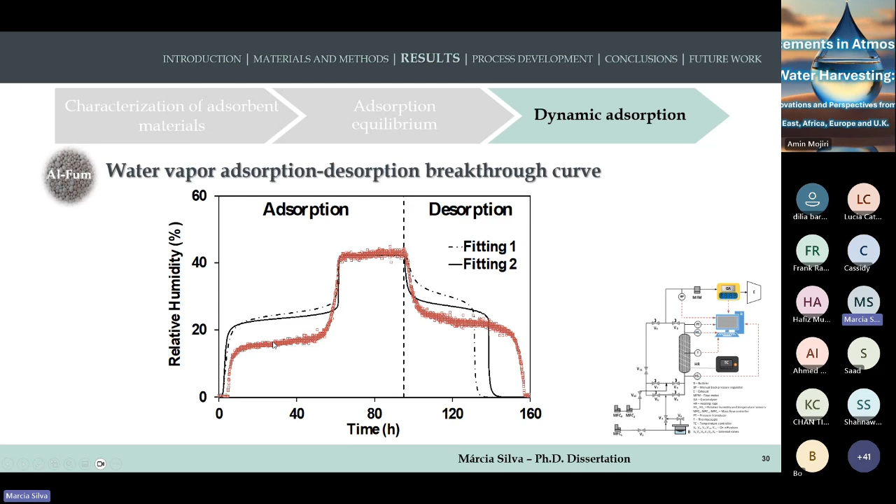In the water saturation curves with N2 and CO2, it was observed that these gases do not influence the dynamic behavior of water adsorption. And in the model, although a multiple component equilibrium is not considered, it is able to predict the breakthrough curve well.

In the DRIFT experiments, the water band decreases with increasing temperature, as expected, and the structure is not affected up to temperatures of 423 Kelvin. Water absorption increased the water band, and similar behavior is observed during absorption with CO2.

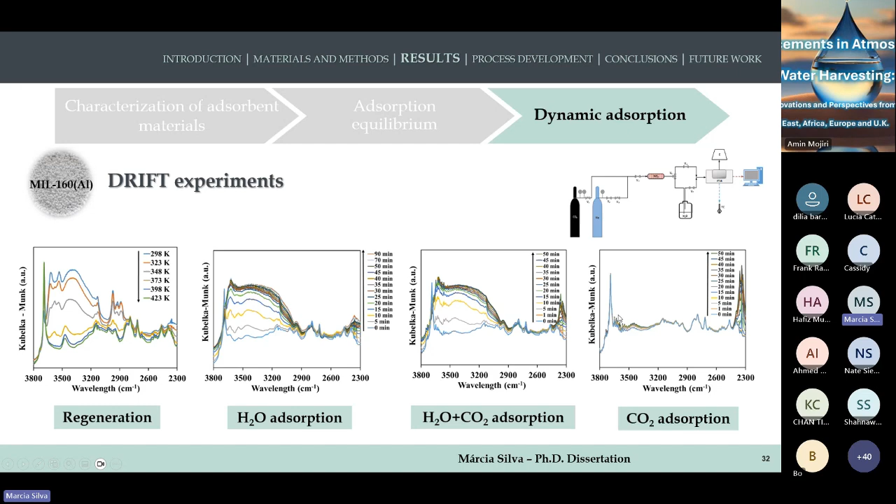As you can see here, along with the increase of the material with the gases, we can see here that the band of water is increasing. Okay, here we only have CO2, so we can see the band of water increasing as expected.

So, two processes were considered for water production: a TSA and a PTSA. In PTSA, an operating pressure of 0.3 bar was considered. And for both processes, two stages were considered: feeding at night and concurrent purge during the day. The optimal absorption and desorption times were obtained by trial and error.

The following environmental conditions were considered: a temperature of 298 degrees, relative humidity of 50%, and a pressure of about 1 bar.

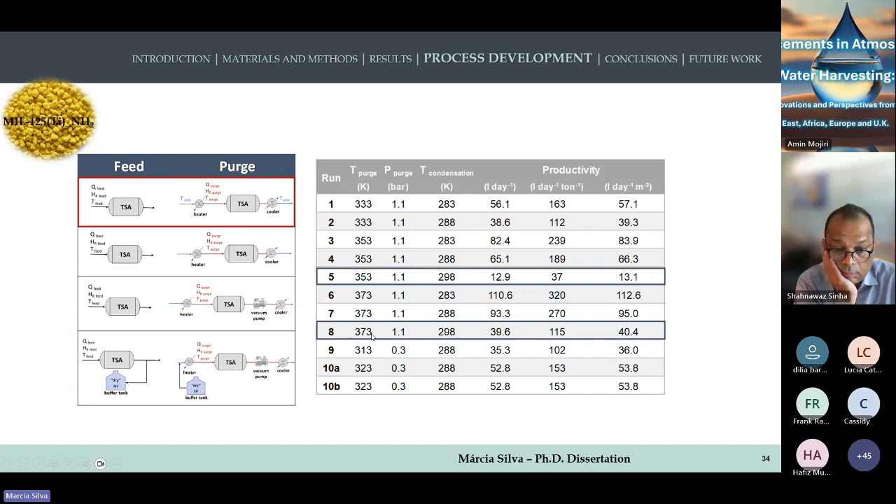Different purge and condensation temperatures were used. In runs 5 and 8, ambient temperature was considered as the condensation temperature, with 353 and 373 degrees used as purge temperatures. In the remaining runs, condensation temperatures of 283 and 288 Kelvin were used, along with purge temperatures of 333, 353, and 373 degrees.

The goal of the PTSA process was to lower the purge temperature. However, it resulted in decreased productivity compared to the TSA.

Another idea was to redirect the dry air from the column outlet back during feeding to be used later in the purge. However, this did not impact productivity compared to the runtime; it had the same productivity and didn't affect the process.

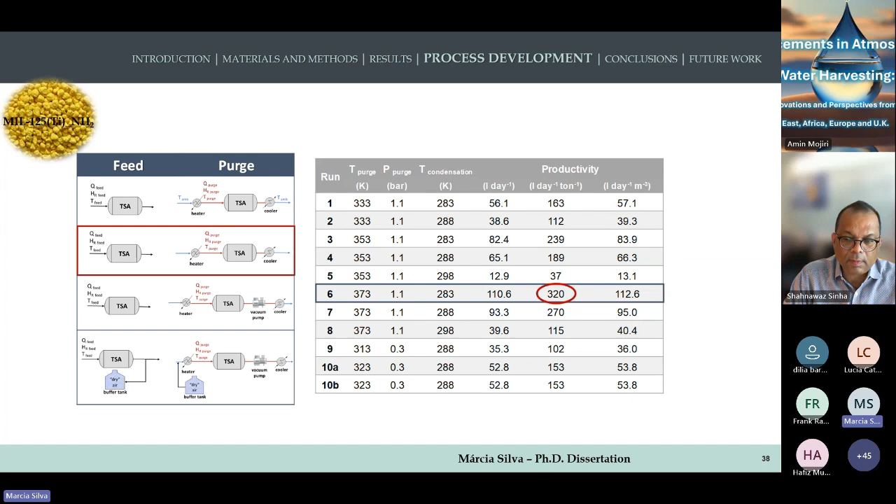For this scenario, the internal relative humidity and temperature history of the gas at the middle and end of the column was achieved in run 6, with the highest purge temperature and the lowest condensation temperature. I will indicate for this scenario the internal relative humidity and temperature history of the gas at the middle and end of the column as well.

The relative humidity profile shows that by the end of the desorption stage, the column was fully regenerated.

The internal relative humidity profile indicates that 5,000 seconds before the end of absorption, the shock wave reaches the end of the column, and the column is nearly saturated, reaching the maximum absorption capacity of about 18 mole per kilogram.

Here, the TSA process served as a baseline study, now with CAU-10, MIL-100 iron, and MIL-160 aluminium. The operation conditions were maintained and condensation temperature was set to 283 Kelvin.

For the column volume of 0.98 cubic meters, it was found that the cycle would need to be longer than 1 day to be completed.

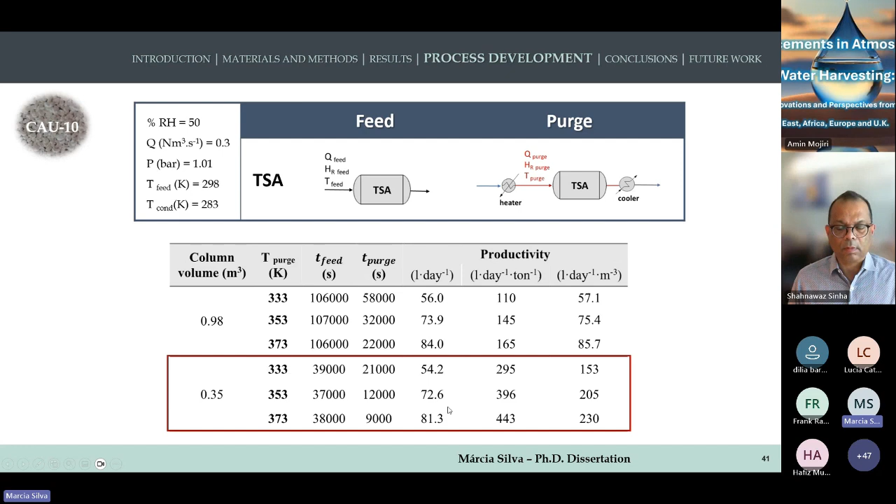The same issue occurred with the MIL-100 iron, and the same adjustment was made, achieving a productivity of about 87 liters per day.

Cycle times were optimized using the particle swarm optimization model. In this model, the particle tries to reach its best position relative to the group by adjusting its velocity. The times were optimized using this model.

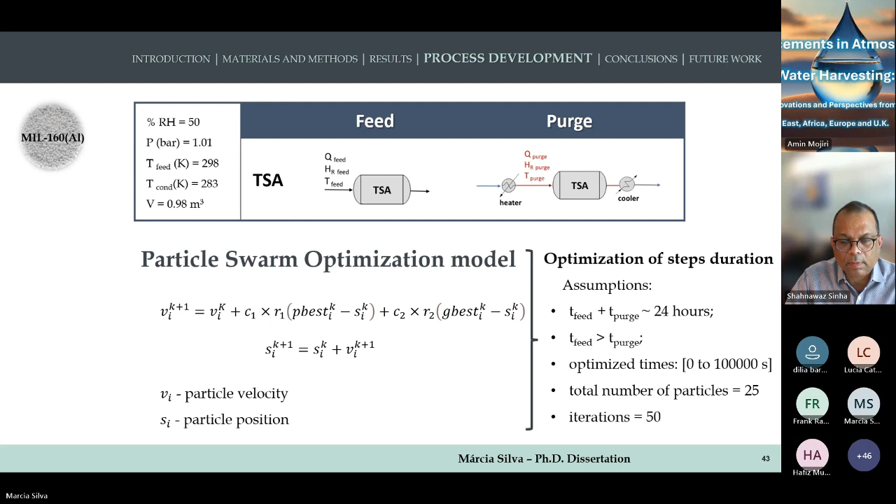The purge was set at 353 Kelvin and the flow rate was varied. As expected, the highest productivity was achieved at the highest flow rate.

Next, the flow rate was fixed and the purge temperature was varied. The highest productivity was achieved at the highest temperatures.

Main conclusions: the thermal stability of CAU-10 is stable up to 1,100 Kelvin, but most MOFs are stable only up to 630 Kelvin.

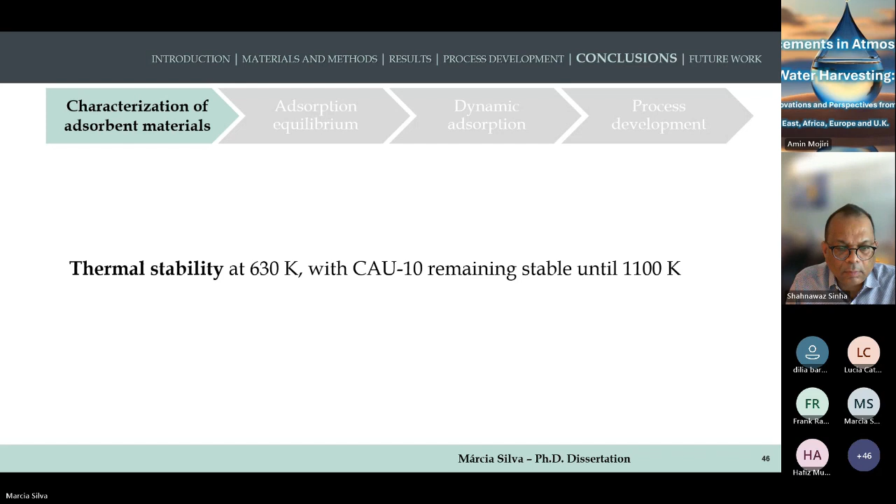In adsorption equilibrium, we saw which material is most suitable for each region. For example, for regions with low relative humidity, MIL-160 aluminium is more suitable. CAU-10 and MIL-125 titanium are suitable for regions with relative humidity around 20%.

Aluminium fumarate displays a sharp uptake for relative pressures between 25% and 40%. The MIL-100 iron, which has two types of cavity, is suitable for two types of regions: one for relative humidity between 20 and 30%, and the other between 35 and 40%.

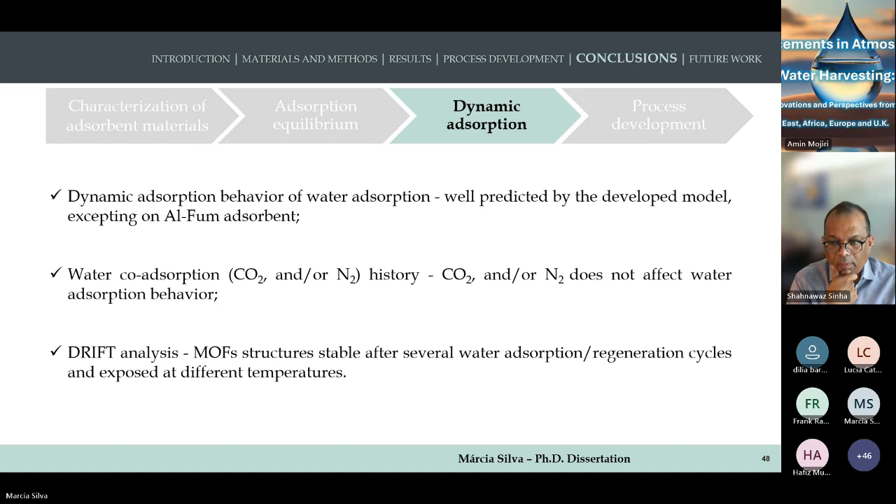So these are the main conclusions for each kind of MOF, and the design of an efficient adsorption process for water harvesting was achieved. The model is flexible and able to predict process performance for different regions, adsorbents, and operating conditions. These are the main operating conditions by which we achieved these results.

Future work will focus on enhancing the stability and regeneration efficiency of MOFs, as well as integrating these materials into a scalable atmospheric water harvesting system.

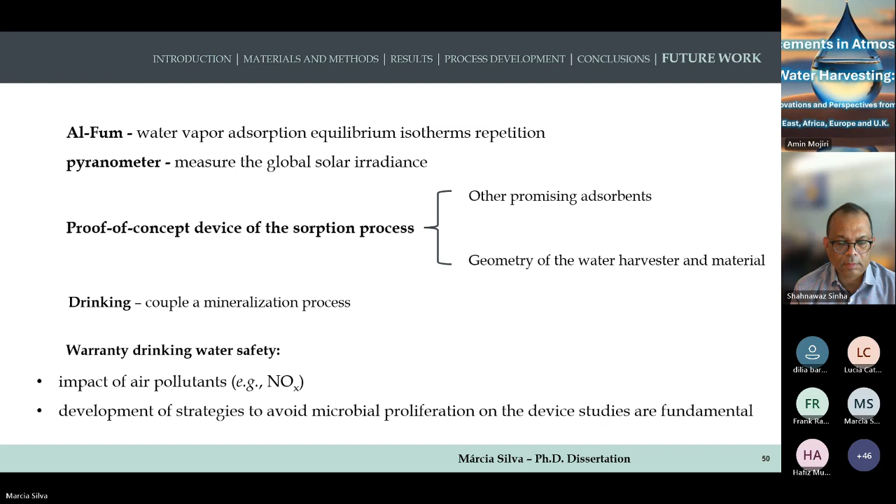In summary, MOFs offer a promising solution to water scarcity by enabling efficient atmospheric water harvesting across a range of environmental conditions. By continuing to refine these materials and processes, we can make significant strides toward sustainable water supply solutions. Thank you all for your attention.